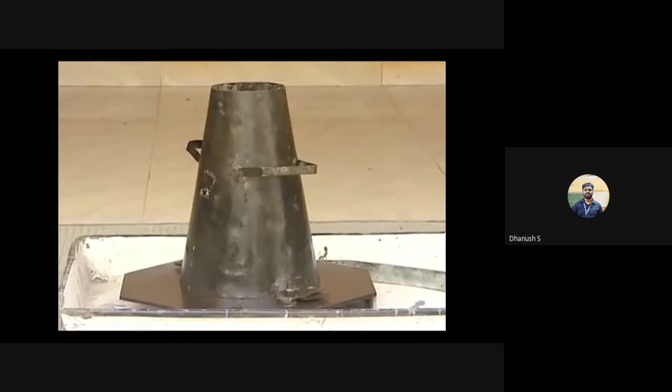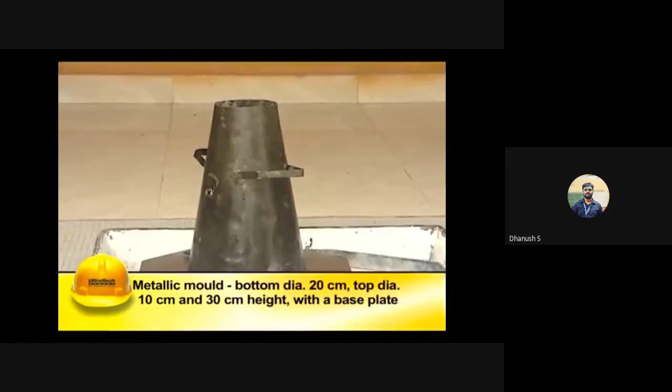The ease with which one can work with concrete is called workability. This can be measured using a simple test called the slump test. Let me show you the procedure. Slump cone test is a simple and popular test extensively used at sites to assess the workability of the concrete mix. The test should be conducted at the commencement of the concreting operations or whenever the workability of the concrete changes. The apparatus for conducting the slump test essentially consists of a metallic mold in the form of a frustum of a cone with a base plate.

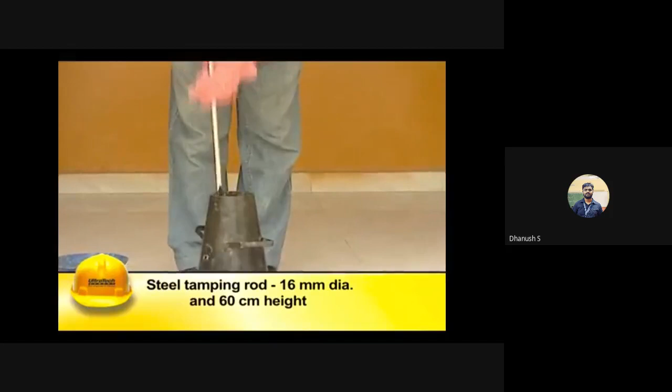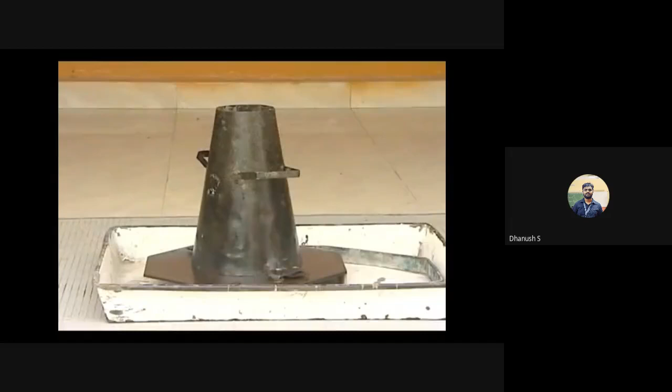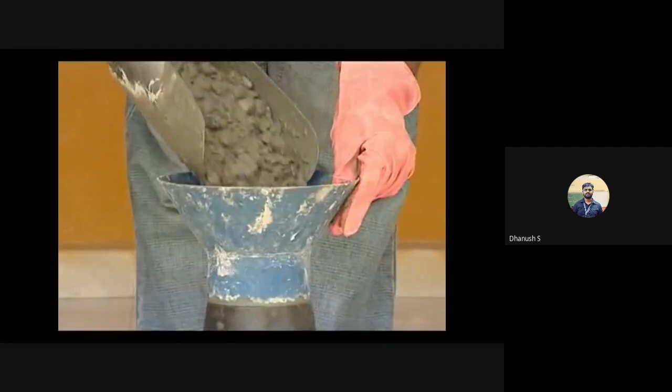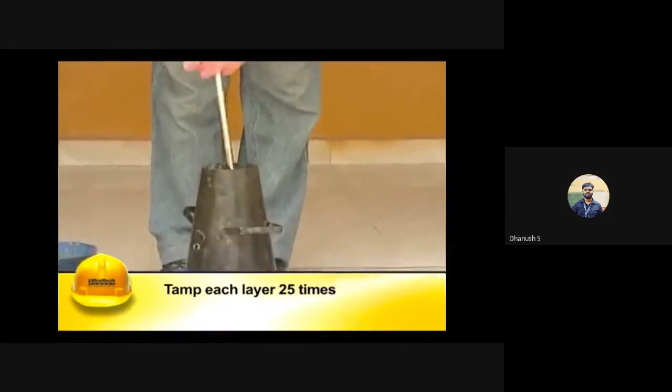A steel tamping rod of 16 mm diameter and 60 cm height is to be used for compacting. The internal surface of the mold should be thoroughly cleaned of moisture and any hardened concrete before commencing the test. The mold is placed on a smooth, horizontal, rigid and non-absorbent surface. It is then filled in 4 layers, with the thickness of each layer being approximately 1/4 of the height of the mold. Each layer should be tamped 25 times evenly using the rounded end of the tamping rod such that strokes are uniformly distributed over the cross section.

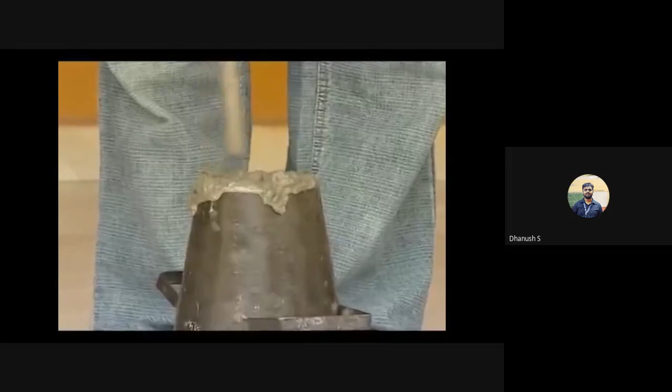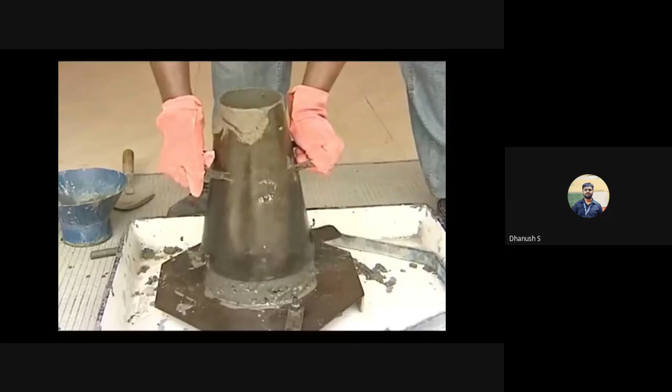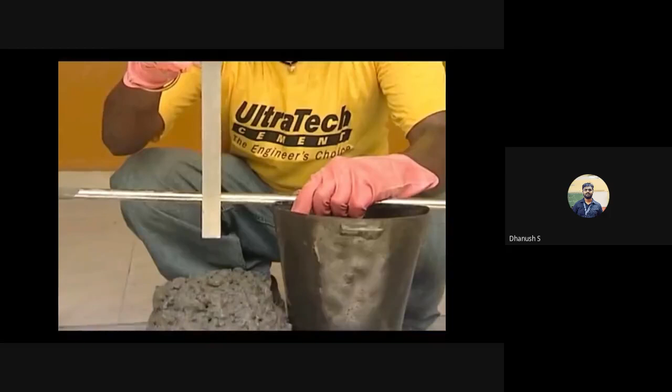After the top layer is tamped, the concrete is leveled with a trowel so that the mold is filled exactly to the top. The mold is then removed by raising it gradually. The concrete will subside; this subsidence is known as slump. This operation shall be carried out without any jerks or vibrations and within a period of 2 minutes after completion of final tamping. The difference in level between the height of the mold and that of the highest point of the subsided concrete is measured. The subsidence measured is the slump of the concrete.

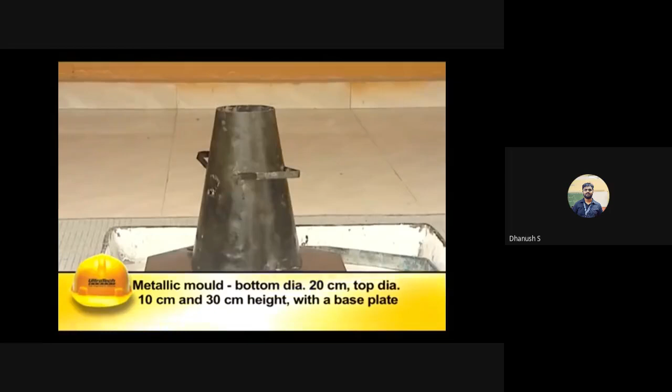A steel tamping rod of 16 mm diameter and 60 cm height is to be used for compacting. The internal surface of the mold should be thoroughly cleaned of moisture and any hardened concrete before commencing the test. The mold is placed on a smooth, horizontal, rigid and non-absorbent surface. It is then filled in 4 layers, with the thickness of each layer being approximately 1/4 of the height of the mold. Each layer should be tamped 25 times evenly using the rounded end of the tamping rod such that strokes are uniformly distributed over the cross section.

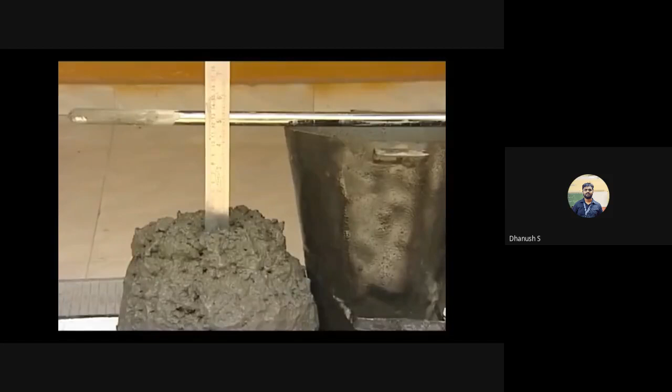After the top layer is tamped, the concrete is leveled with a trowel so that the mold is filled exactly to the top. The mold is then removed by raising it gradually. The concrete will subside; this subsidence is known as slump. This operation shall be carried out without any jerks or vibrations and within a period of 2 minutes after completion of final tamping. The difference in level between the height of the mold and that of the highest point of the subsided concrete is measured. The subsidence measured is the slump of the concrete.

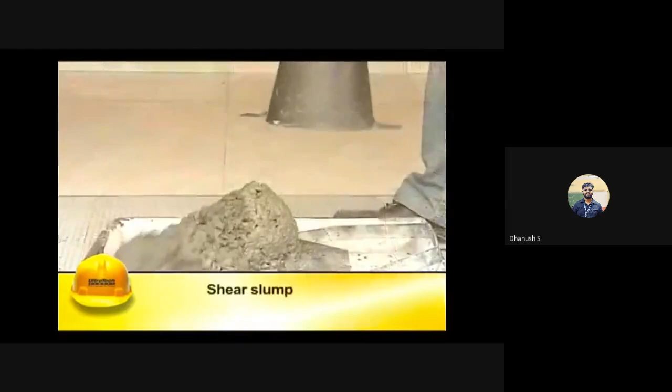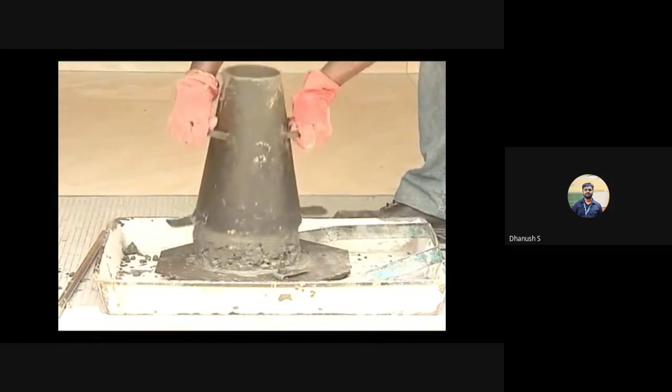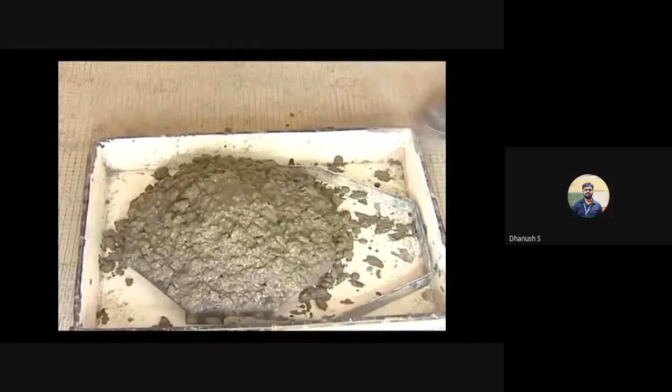The slump may either be a true slump, a shear slump, or a collapsible slump. The true slump is the desired form of slump that we require. In harsh mixes, the concrete slides down in an inclined plane; this is known as shear slump. In collapse slump, the concrete collapses as soon as the cone is removed. It usually occurs in very wet mixes. Concrete demonstrating a shear or collapse slump is considered unsatisfactory.

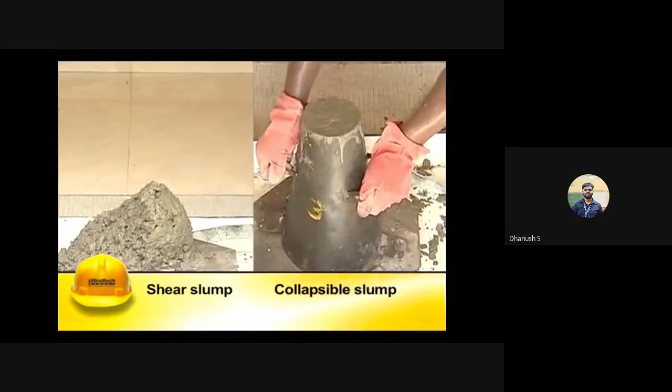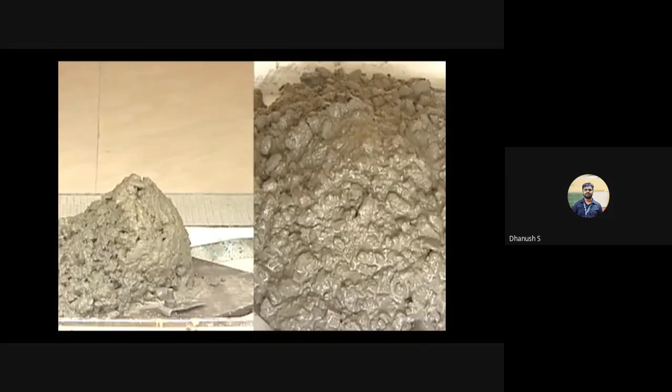In case of slump results beyond the specified limits, the mix proportion needs to be adjusted, especially the water content. The slump can also be varied by changing the proportion, size and combination of the various sizes of the aggregates. It is advisable to assess the workability of concrete mix using a slump cone. Ensure that the cone is filled in a proper manner as indicated. Notice the type of slump. Shear and collapse slump are undesirable. Adjust the slump to the desired value by changing the proportion.

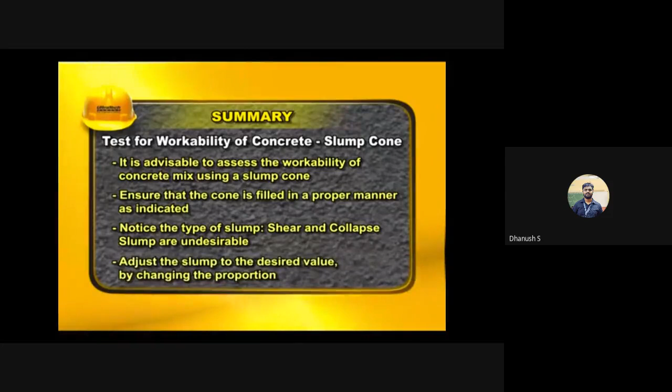Everyone saw the video. So what I'll try and do is pause the video at various instants and explain some of the key points.

Slump test is very important. When you start your mix design, there are various inputs required, for example, the grade of concrete, where the concrete is going to be used, the exposure condition, meaning is it on the seaside, is it in a residential area, is it in a waterlogged area.

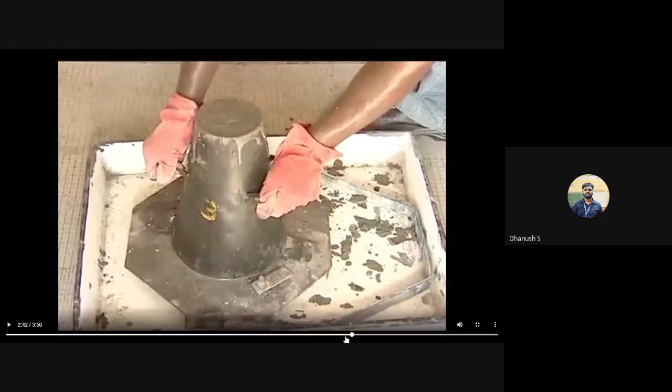In addition to all this, workability is something the client needs to mention. The client needs to tell us, I need 50 mm slump, I need 150 mm slump, I need 200 mm slump. So what do all these numbers indicate? I think you must have realized from the video.

When you measure this amount, measured in mm, from the top of the mold to the highest point on the collapsed slump of concrete - in this particular case, it is about 130 to 140 mm, 13 centimeters. So this concrete has a slump of 130 mm. This is the number that the client needs to specify.

So why is this slump important? It depends on the purpose. Imagine the concrete ordered is to be used for laying of the foundation. Foundation is typically a flat bed, not very deep, and it can be easily compacted with the help of tamping or pounding.

In such cases, you might not really need concrete that is very workable, so the client might order 50 mm slump. Whereas if the client wants to cast a very deep column or a very deep shear wall, where you can't insert even a vibrating needle, or rodding or tamping won't work, you want the concrete to flow easily. In that case, the client will desire a slump of 200 mm, 250 mm - something more workable.

Once the RMC plant delivers the concrete to the site, the first thing the site engineer will do is take a sample of concrete and do a slump test. If the slump test passes whatever the client's requirement was, he'll accept the concrete and it will be used for placing and further concreting.

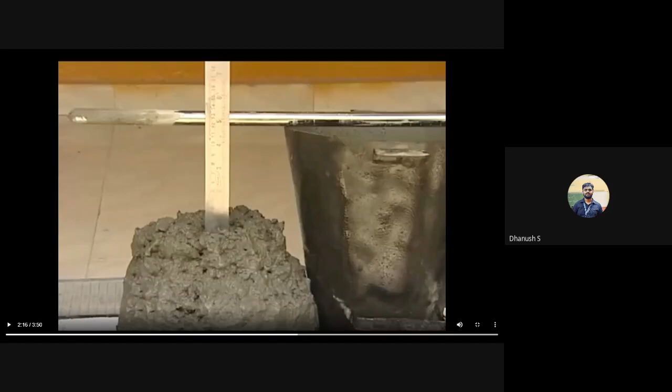Now, how does this test work? You have a frustum of a cone with a height of 300 mm. The top diameter is 100 mm, the bottom diameter is 200 mm. So whatever concrete you have, you fill it into this.

One key difference between this video and the procedure in your lab manual is that here he fills it in 4 layers, each layer tapped 25 times. We do it in 3 layers - 1/3, 1/3, 1/3 - each layer tapped 25 times.

But effectively, we also do it in 4 layers because after the 3rd time we fill and tamp it, a little bit of the top concrete comes out. So in such case, we take some excess material, fill the top, make a level surface. But compaction, we do only 3 times, each layer tamped 25 times.

The tamping is done using the tamping rod, which I explained in the compaction part also. This rod has a diameter of 16 mm and a height of 60 centimeters. One of its sides is a flat head and the other has a rounded head. You should always use the rounded head to do the compacting.

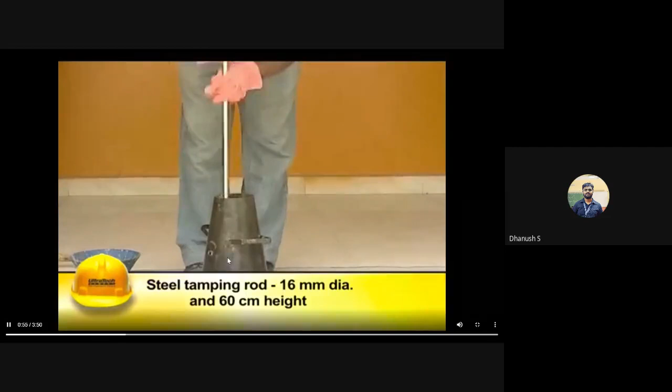When you are doing the rod tamping process, you should ensure that the tamps are evenly distributed throughout the top surface. You don't localize it to only one zone.

So if you localize it to one zone, you'll get a shear failure of slump in the end. You should ensure that the compaction happens uniformly.

Once you fill concrete in 3 layers and finish the top level of the surface like this, when you're lifting the slump cone to the top, 2 key things to notice. You should never shake it too much, and you should never twist it too much. A slight shrug is fine, to ensure that the concrete is not sticking to the mold, but you should never shake it too much or twist it too much.

That will disturb the concrete that is inside, and the results will not be very accurate. So that is one key thing: no shaking, no twisting.

So in order to avoid the shaking and twisting, what we tend to do in the lab is we oil the insides of the slump cone and the bed. We apply a greasy oil sort of thing on the surface, so that the concrete, when it's poured inside and compacted, does not stick. So when you try to lift the slump cone, it comes off very easily.

That one thing they're not doing in this video. So we'll oil the thing and then lift it. And once we lift it, we need to measure.

This measuring can happen 2 ways. One, he's shown it in the video. What has he done? He's inverted the slump cone, placed it next to the collapsed slump, and measures the distance from the top of the slump cone to this thing.

The other way, these days, all these slump cones come with an attached limb here. Can you see this limb here? It is a hexagonal limb, or it resembles a hexagon. What you can do is lift it, make sure it is vertically upright exactly above the slump, and there is a hole provided on top of this hexagon through which you can insert a scale or something to measure the value of slump.

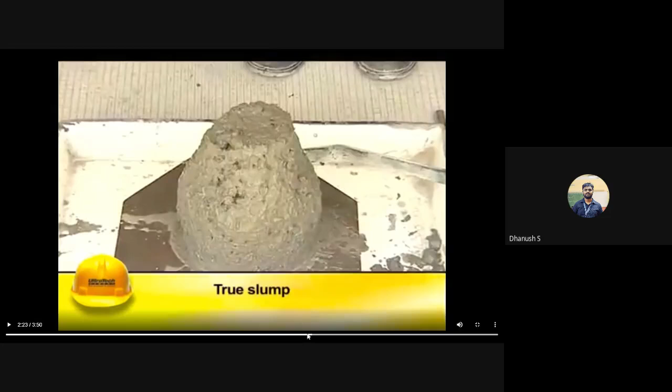This is true slump, meaning your mix design is good. Your materials are holding together well. The paste and the aggregates form a good consistency together, holding together. Whereas when you go to shear slump, what happens?

The percentage of coarse aggregates in this case might be more. So the paste that you've incorporated in the mix design might not be sufficient to hold or bind the entire thing together. So there will be a shear failure, and shear failure normally happens in an inclined plane.

You can notice this when you're filling or just playing with sand also. If you make a heap of sand, beyond a certain point, there's a layer that shears off. Same concept here. There is not enough force to hold them together.

So if you notice a shear slump when you do your slump test, again, reject the concrete because the mix design is not proper. The other type of slump you can observe is a collapse slump, where everything flows away.

This can happen when the mix has too much water in it. Collapse slump should not ever be mistaken with, say, self-compacting concrete. In self-compacting concrete, again, you will notice something like this, but the concrete will flow. But there, despite the concrete flowing, everything is still together. It is a viscous mass.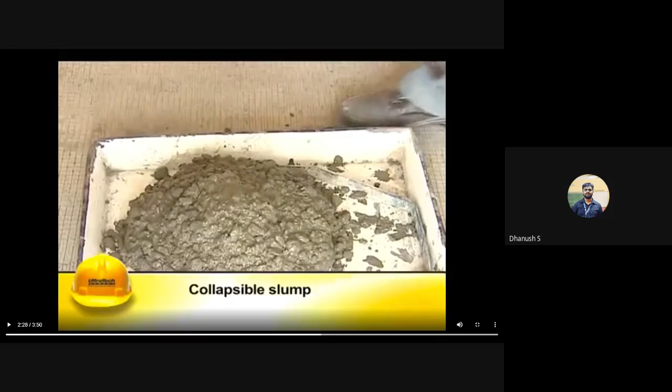In case of collapsible slump, that is not the case. Your aggregates and water are separated from the rest of the paste matrix, and it is just very incohesive. So if you notice a collapsible slump when you do a slump test, again, reject the concrete sample you've got. Clear? So this is how a shear slump looks like, and this is how a collapsible slump looks like. Is everyone clear with how to perform the slump test?

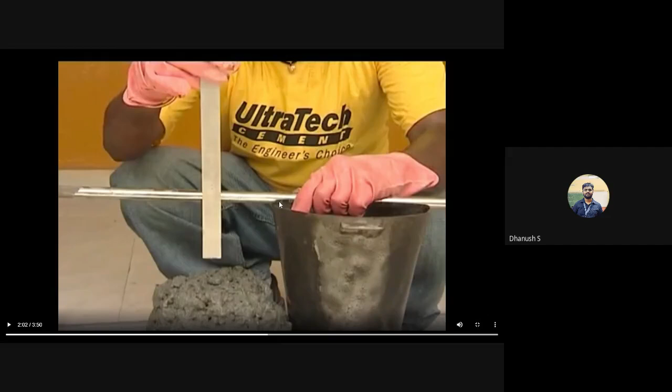So what are all the things you need? You need a slump cone, a tamping rod, and a scale. That is all. If you don't have a scale, you can use the tamping rod to measure as well. That is as far as the slump test is concerned.

Everyone clear with slump test? Can we do the next test? We have half an hour, we will try and finish the other 2 tests. Clear? Yes, sir. Yes, sir.

Okay, so moving on to the next test, that is the VB test. I'll finish off VB because slump test is a part of VB test. I'll tell you how.

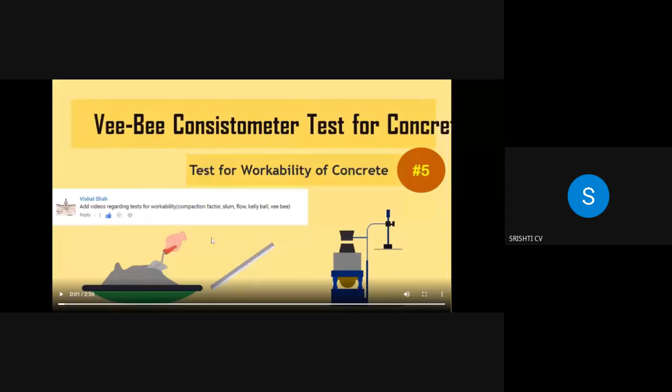Is the screen visible? Yes, sir. Consistometer test for concrete. VB consistometer test is used to determine the mobility and compactability of concrete.

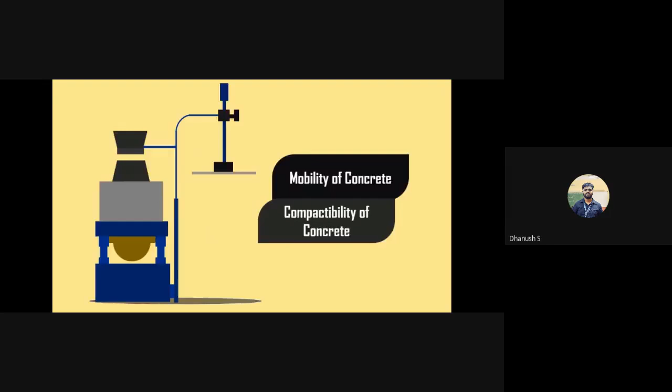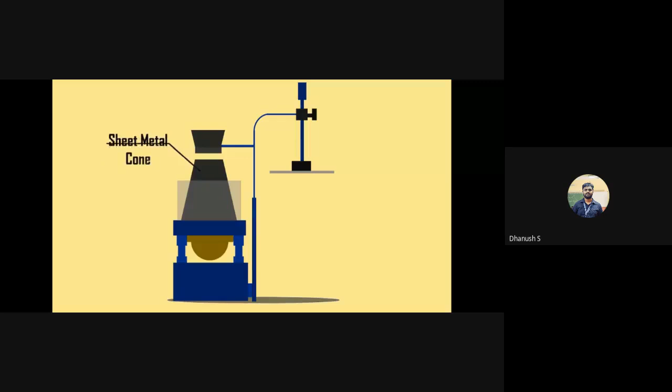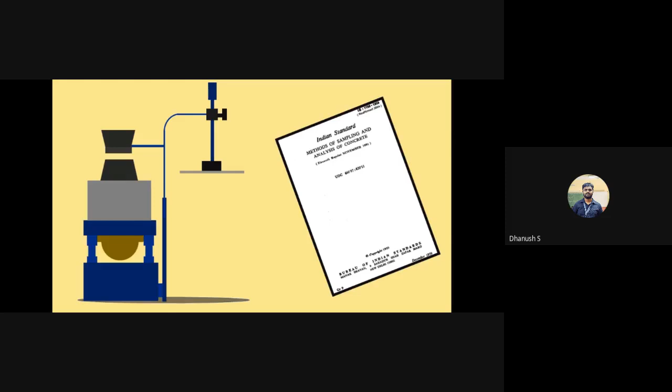The VB consistometer test consists of a vibrator table resting upon elastic supports, a metal pot, a sheet metal cone open at both ends, and a graduated rod connected with a glass disc. The entire setup is shown on the screen. The dimensions of the various shapes are designed based on IS 1199-1959. Today, we are not going to concentrate on dimensions. Let us now start with the procedure.

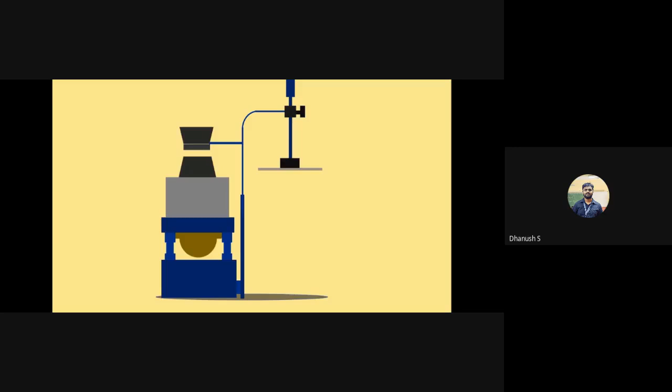Place the slump cone inside the cylinder. Now, fill the concrete in 4 layers, each 1/4 of the cone height, and tamp the surface 25 times. Once filled, strike off the excess concrete.

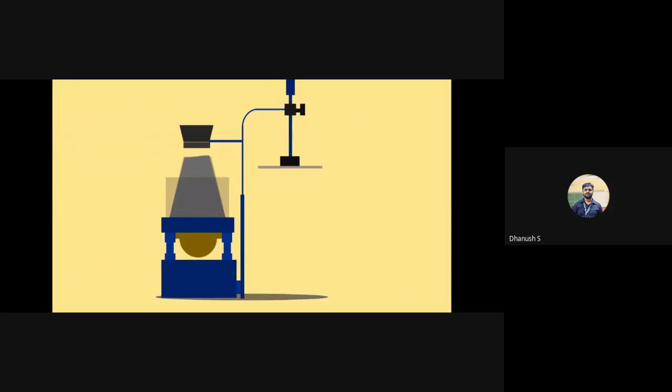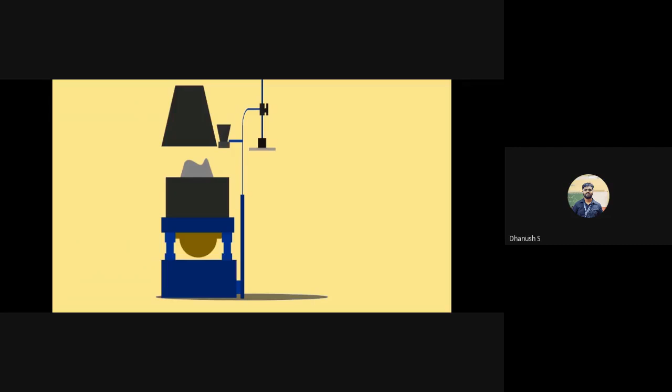Move the glass disc attached to the swivel arm and place it on the slump cone such that it touches the top of the concrete level. Note down the reading in the graduated rod. Next, remove the slump cone by raising it slowly in the vertical direction. Again, place the glass disc and determine the reading.

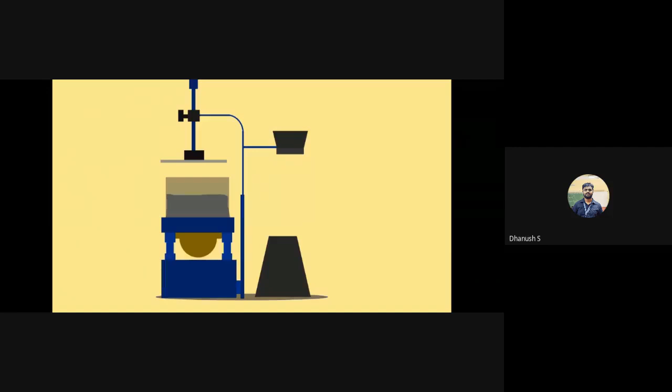Now, switch on the electrical vibrator and at the same time switch on the stopwatch. The concrete will start to spread in the cylinder container. Continue the vibration until the concrete is remolded and the surface becomes horizontal. Stop the vibration and the stopwatch. The time in the stopwatch denotes the workability of concrete, expressed in VB seconds.

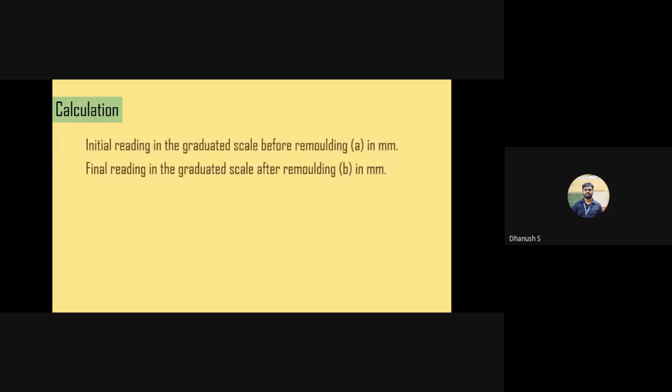Calculations in VB consistometer: initial reading in the graduated scale before remolding, and final reading in the graduated scale after remolding. Slump value is equal to initial reading minus final reading. And the consistency of the concrete is measured in VB seconds.

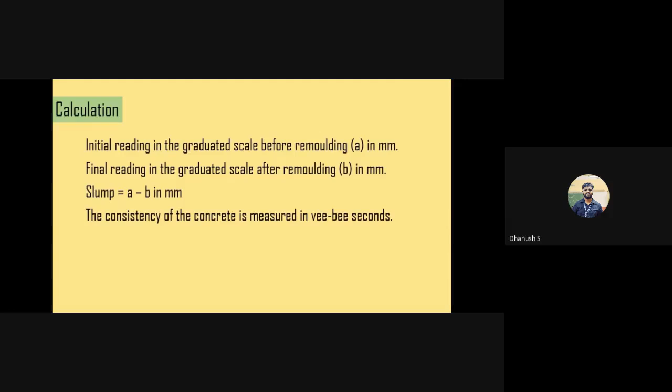The workability conditions with respect to VB time are displayed on the screen. Thank you for watching. Stay tuned, the best is yet to come.

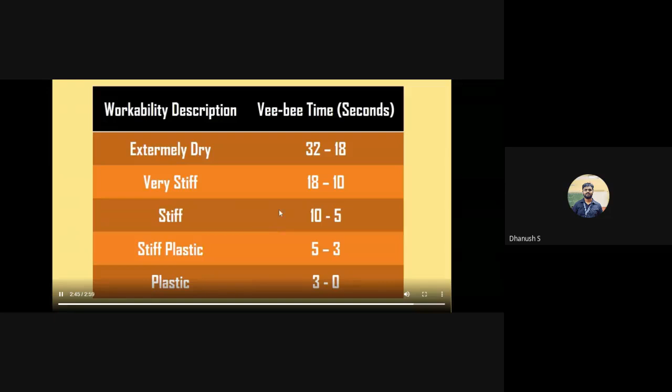You take concrete, fill it into this mold in 3 layers, tamp each layer 25 times. Then lift the cone and measure the slump.

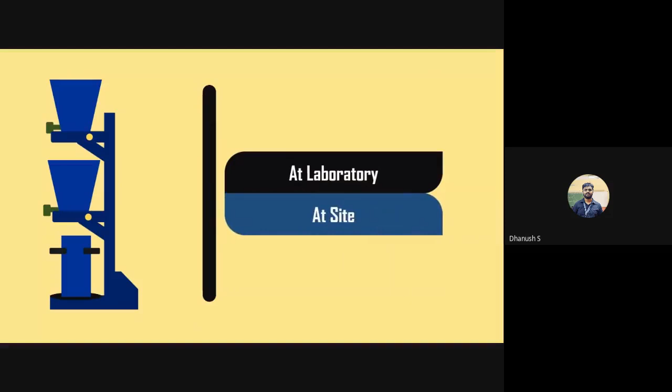The compaction factor test is designed generally for use in the laboratory, sometimes used on sites. This test has the advantage of being used for concrete mixes of very low workability.

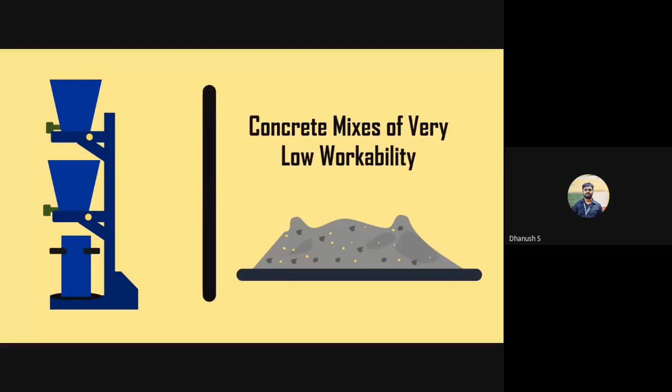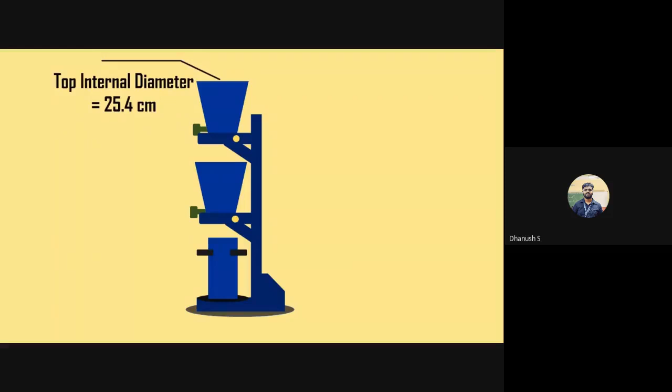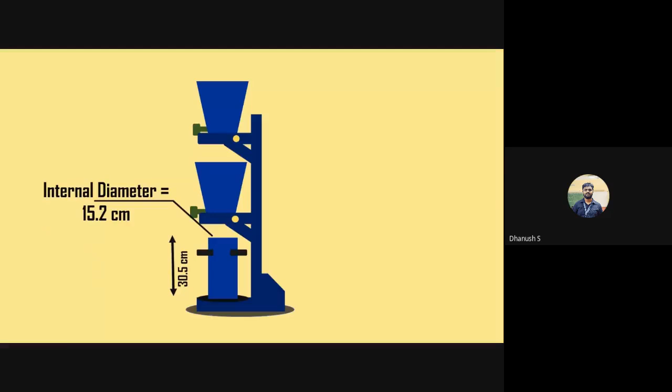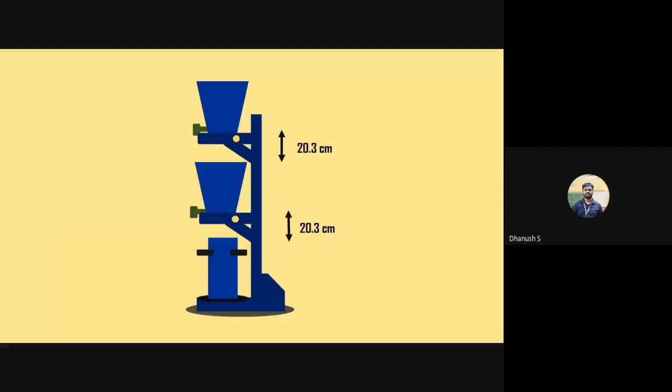The compaction factor apparatus consists of the upper hopper of dimensions: top internal diameter 25.4 cm, bottom internal diameter 12.7 cm, internal height 27.9 cm. A fixed lower hopper of dimensions: top internal diameter 22.9 cm, bottom internal diameter 12.7 cm, internal height 22.9 cm. And a cylinder of internal diameter 15.2 cm and internal height 30.5 cm. The distance between the upper and lower hoppers, and between the lower hopper and cylinder, is 20.3 cm.

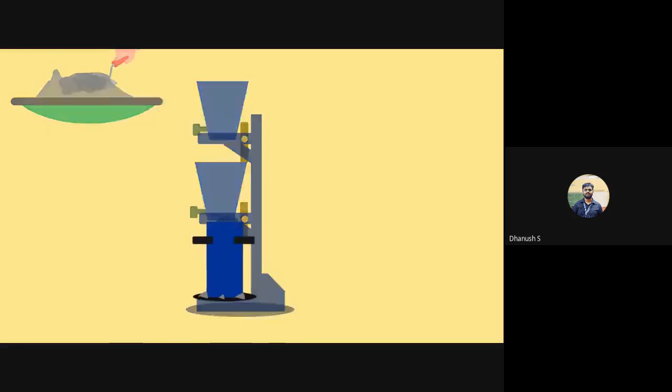Procedure: the sample of concrete to be tested is placed in the upper hopper up to the brim. The trap door is opened so that the concrete falls into the lower hopper. Then the trapdoor of the lower hopper is opened and the concrete is allowed to fall into the cylinder. The excess concrete in the cylinder is leveled. The outside of the cylinder is wiped clean. Now the cylinder filled with concrete is weighed.

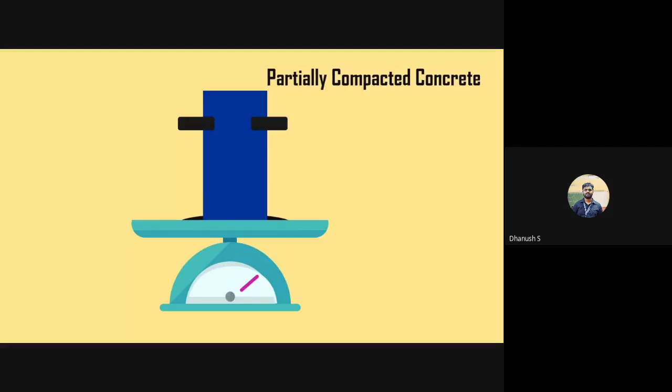This weight is known as the weight of partially compacted concrete. Then empty and clean the entire cylinder. Now fill the cylinder with concrete in layers, each approximately 5 cm deep. Once fully filled, the top surface is leveled off, and the outside of the cylinder is wiped. Now weigh the cylinder. This weight is known as the weight of fully compacted concrete.

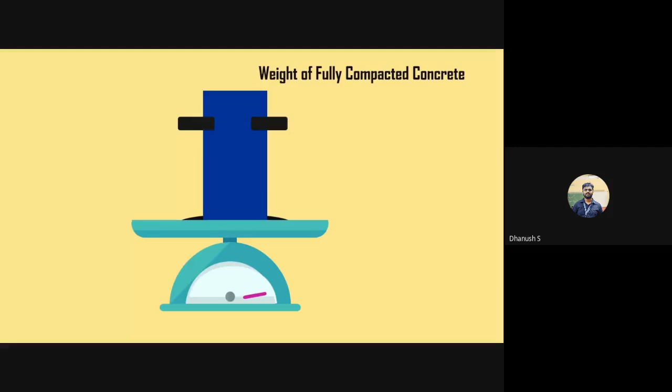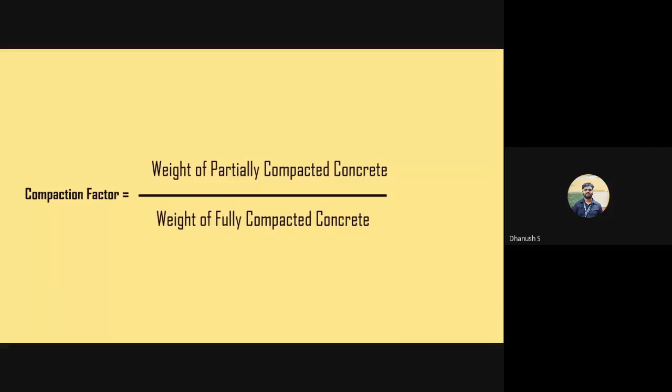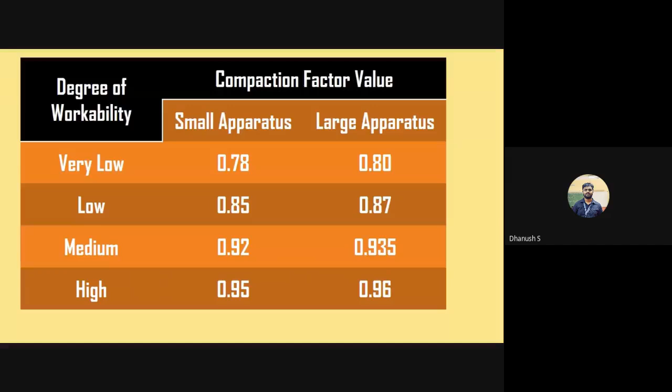Okay, it's clear what was happening. I'll try to show how the apparatus looks like again.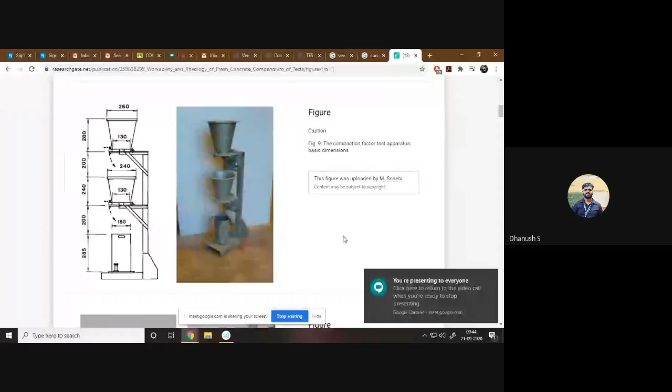So if you can see the screen, this is how a compaction factor apparatus looks like. You basically have two buckets, or what we call hoppers: a top hopper, which is slightly bigger in size, and a bottom middle hopper, and then a cylinder at the bottom.

In this test, what we're essentially trying to measure is the compactive energy that is required to compact concrete. How does it work?

First, take concrete and simply place it into the top hopper, without compacting, without tamping, nothing. Take a trowel, take a pan, take the concrete, place it inside the top hopper. At the bottom of this top hopper, you have a latch, like a gate, a small shutter sort of thing.

You open the latch, the concrete that is there in the top hopper will fall off into the middle hopper. So this is step one.

So in step one, what happens? Something that was totally uncompacted, when it is dropped from a certain height, achieves a certain degree of compaction. So at this stage, it is said to be slightly compacted.

Next, what you do is open the latch at the bottom of the middle hopper as well. Now what happens? The concrete that is there in the middle hopper will fall into the cylinder. Once it has fallen into the cylinder, you take it out, level the top surface, and go and measure the weight.

There was one small mistake in the video. Initially, what you should have done is note down the weight of the empty cylinder. So weight of the concrete inside the cylinder will be equal to weight of the cylinder plus concrete, minus weight of the empty cylinder.

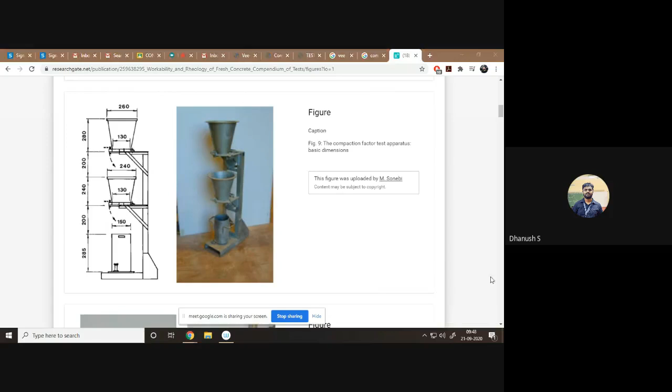The bottom layer - fill it in 3 layers, each layer tamped 25 times. So we are basically ensuring that it is in a fully compacted state.

And normally you'll observe, whenever you do this test, in the fully compacted state, whenever you go and measure the weight, it will always be more than whatever weight you get from the partially compacted state.

So the ratio of this partially compacted state to the fully compacted state is what we call the compaction factor. Some textbooks actually prefer to define it as the density of concrete in partially compacted state to density of concrete in fully compacted state.

Nothing wrong, equally correct. It's just that when we talk about density, what is density? It is weight per volume. So volume of the cylinder is going to be constant for both the partially compacted and fully compacted state, so density is weight by volume divided by weight by volume of fully compacted concrete.

Volume being the same, you can cancel it out. It effectively reduces to weight by weight only. So you can follow either definition - either as a ratio of weights of partial to fully compacted, or as a ratio of densities of partially to fully compacted. Both are perfectly fine. Understood how this test is done.

So what is the maximum possible value of compaction factor?

Correct, 1. So if you have a concrete that is very flowy or very workable, your partial density and fully compacted density are going to be equal.

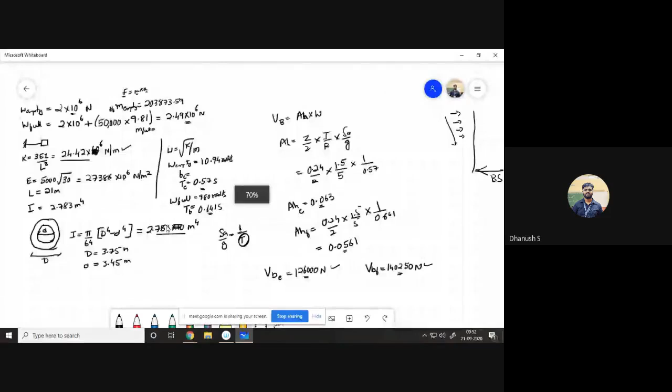How much concrete should you mix? Should you mix 20 kgs? Should you mix 50 kgs? You need to be very scientific about it, you cannot mix however much you want. One second, I'll just erase this off. Can you guys see the screen? Yes sir, okay, it should be a blank screen.

So I'll show you volume calculations for one thing, and the same procedure is applicable for everything. So in case they ask you to cast 3 cubes, you should know what to do. In case they ask you to cast 2 cylinders, you should know what to do. I will do it for a slump cone. So we just discussed what is slump cone.

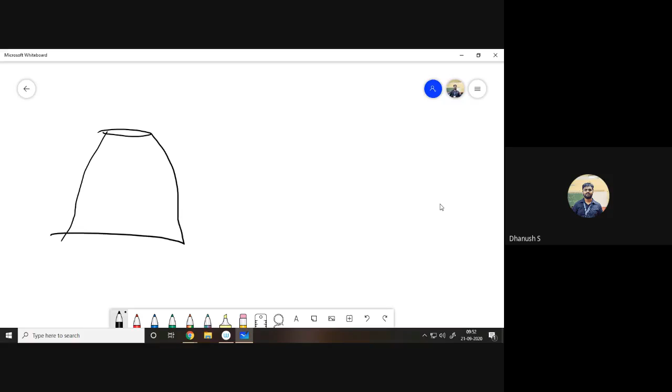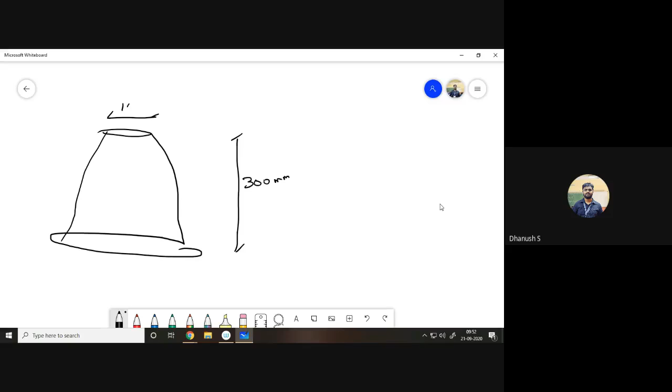So it is basically a frustum of a cone — ignore my drawing skills, they're very bad. A frustum of a cone whose height is how much? 300 mm. 300 mm, correct. The top diameter is 100 mm and the bottom diameter is 200 mm. Okay, how much concrete should I mix?

So basically I need to mix concrete that will effectively fill this entire thing. So to fill this entire thing, I need to know the volume of this thing. How do you find out volume of frustum of a cone? What is the formula?

So 1/3 pi r square h — that is for a cone. What about frustum of a cone? One by 3 pi h into capital R square minus small r square?

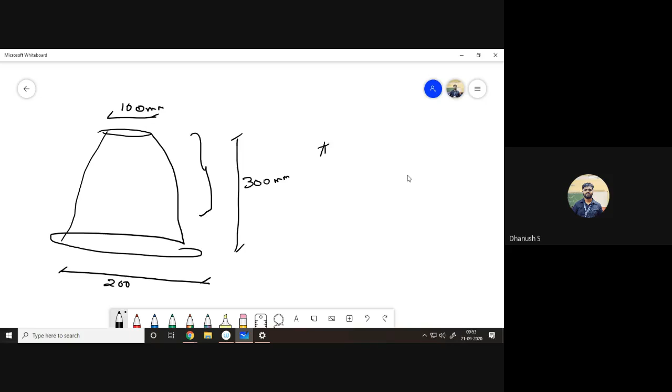No, something else. It's very close to that, but what? Think of it. Okay, it's actually this: pi h by 3 into R square plus R r plus r square... wait — it's pi h by 3 into R square plus r square plus R r, where capital R and small r are the bottom radius and top radius.

Some people tend to use a very different thing — they find out the top area, they find out the bottom area, they find the average of these two, and multiply it with the height. This is actually wrong. If someone tells you to use this formula, please tell them, sir, this is wrong. We will use the correct method: pi h by 3 into R square plus r square plus R r.

Now someone quickly take out a calculator and tell me what this value will be. Capital R is your bottom radius — so bottom diameter is bottom radius. Bottom diameter is 200 mm, so what will your radius be? 100 mm. 100 mm is how much? 0.1 meter, is that correct?

So substitute everything in meters. Next, take your top — it will be 0.05 meter, is that correct? And the h is going to be how much? 0.3 meter. So substitute this and get me the volume of the frustum of a cone.

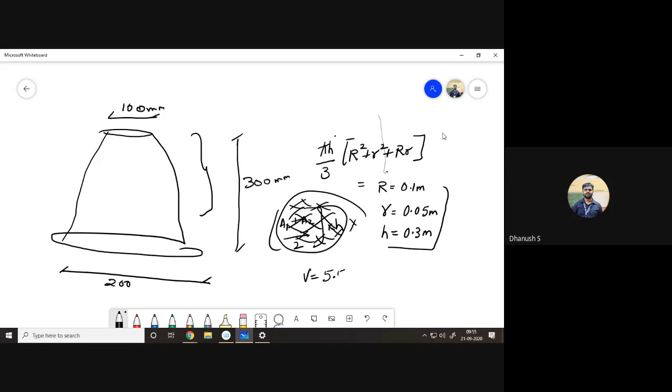Anyone finish? Okay, guys are very slow. I vaguely remember the value, it should approximately be 5.5 into 10 power minus 3 meter cube. Is this correct? Yes, sir. Yes, sir. Okay.

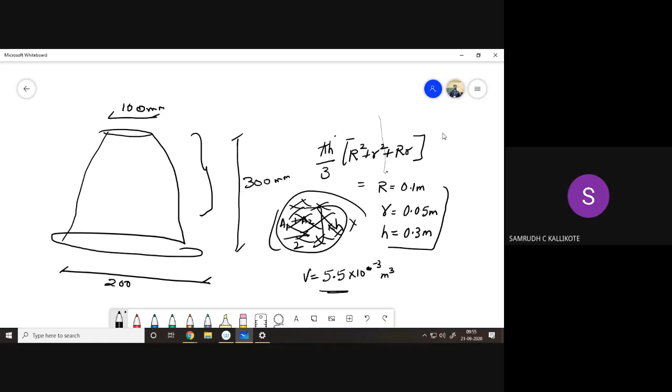Yes, it's correct. This is the volume of frustum of a cone in meter cube. Next, what you need to do, you have the volume, but you still don't know in what proportion you need to do the mixes. Correct. So remember this thumb rule.

We assume the density of concrete rho should always be 2400 kg per meter cube. Meaning if I have a cube, and the volume of this cube is 1 meter cube, and I filled it entirely with concrete, and I went and measured the weight, it is going to weigh 2400 kgs. So this is always a standard. This is something that you guys need to know.

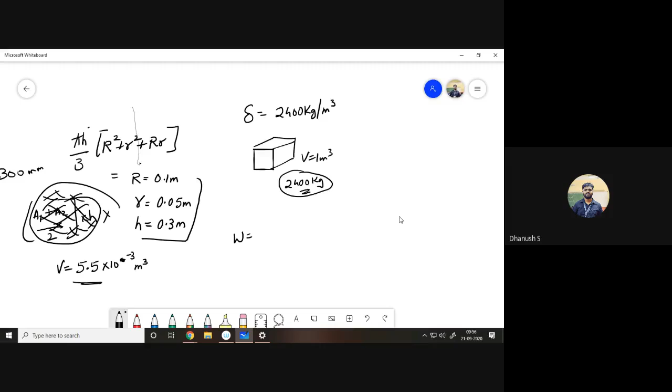So if volume of this frustum of my cone is going to be so much, how much is the weight going to be? What is weight equal to? What is density? Weight by volume, correct? So what is weight equal to? Density into volume. Do this. How much do you get weight as?

13.18 kgs. So what we'll do is, because you guys are still kids and you guys tend to play around a lot, we'll always assume 15% wastage. So whatever total dry weight we get in the end, multiply it by 1.15, meaning add 15% wastage to it. What do you get at the end of it? Tell me a number. Sir, 15.1570. Okay, let's round it off even further and say we've got 16 kgs.

So 16 kgs is the total dry weight of materials that I need to mix to comfortably perform a slump test. So next question would be 16 kgs is fine, but how much of what should I take? So in the question, say in the exam or test or wherever, they'll tell you perform a slump test on concrete mix of ratio say 1:2:3.

With a water cement ratio of 0.5. Now this water cement ratio of 0.5, keep it aside. This 1:2:3 you take. 1 + 2 + 3 is how much? 6. Okay, so this is basically cement, this is your fine aggregate, this is your coarse aggregate.

Now take a cement. So cement content will basically be this 1 divided by this total proportion 6 into this total dry weight that is there, 16. How much is this?